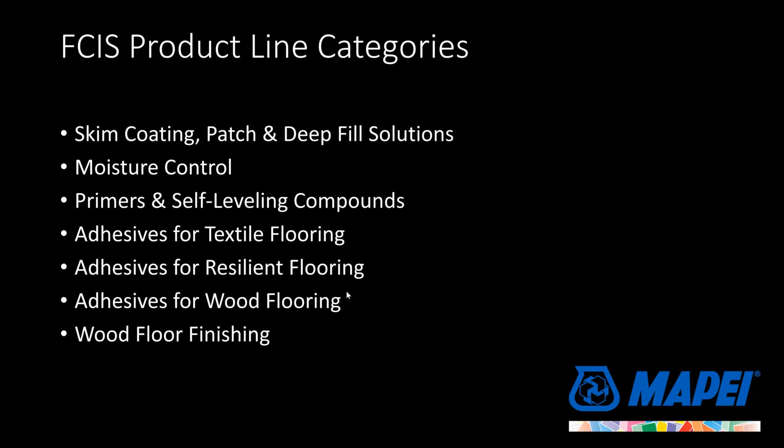Now let's drop down into first gear, hit that first corner, and talk about skim coating, patching, and deep fill solutions. I apologize, this is going to be a little bit of a catalog dump, but I'm going to talk about some of the unique attributes of these as we go along.

I don't have enough time to spend a whole 45 minutes on each one, but there is a product on our catalog that you may or may not be aware of.

It was part of our shower system for LVT, but a very interesting skim coat and patch product called Planiprep 4 LVT. It's pre-mixed based on acrylic technology.

It's high moisture resistant, very hard, very durable. It's a phenomenal embossing leveler component designed for a skim coat. Works on wood, works on concrete, works on gypsum, the whole 9 yards. And it comes pre-mixed, so you don't need water. It works on porous and non-porous substrates as well.

You'll see a couple of my made icons. This is not something the corporation has adopted yet, but I wanted to throw out a few things in the upper right-hand corner of these slides to indicate some of the key attributes of how these things work. That red triangle on top is porous and the other one is non-porous.

So the Planiprep 4 LVT can use them both. And again, once you use a little bit of it, put the lid back on it, it's good for the next project. It has no pot life like a cement-based product.

Planipatch, hopefully all of you know about that, is our Portland cement-based workhorse of patching and repair. Has a great product. It's got a very short pot life aspect to it, very fast drying, great product for general repairs, patching and ramping, the whole 9 yards.

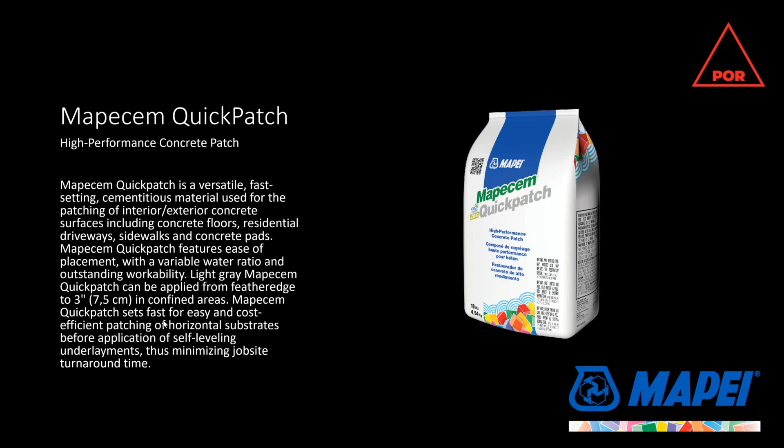resilient flooring, you might want to cover an application like Quick Patch with Planiprep PSC or SC just to get a nice skim coat version. But again, this one is designed for deep fill applications, ramping, and very fast drying.

Topcem Premix, again, if you're trying to fix a floor that has a much larger depth to fill, like a sunken living room that needs to be brought up 2 or 3 inches off the floor.

Well, obviously we have self-leveling underlayment applications for that, but that can be problematic and expensive, a little difficult to deal with. But we have a couple of solutions that are more attainable and easier to work with, and they're screed materials, basically, for lack of a better description. They don't flow per se, but they're designed to be put into deep areas, bull floated into position, allowed to cure, and then you can finish on top of them. You have to think about them as concrete in a bag, but it's not heavily aggregated. It's something that's easy to work with and ramp and do all sorts of stuff.

The other choice we have is a product we've borrowed from the textile and stone side of the fence, Slope RS. This is another great product for ramping and deep filling, perhaps a little faster. We've been using this as the product of recommendation for sloping shower bases if you're doing LVT installation in showers. Again, we like this one because it's easy to work with, easy to handle, and has a very rapid cure and very high strength by the time it's all done.

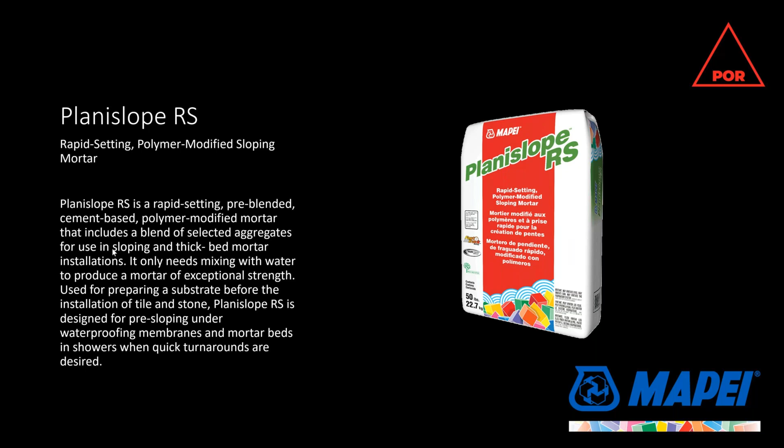So if you took a look at the patch, skim coat, and deep fill charts, you get a chance to see a little bit about their thickness of repair. To give you some idea of the extent, as I mentioned before, Planiprep PSC is a half inch, SC is 1 inch. Planiprep 4 LVT has got some limitations—it's really a skim coat material. If you apply this a little thicker, it takes much longer to dry. Mapecem QuickPatch is that 3-inch product, and as you see below, the Topcem Premix and the Planislope RS are good up to 4 inches.

So that's one of the selection drivers—we'll talk about that in a second—is how deep you have to go and how far you have to spread it. Wait time before the installation of ceramic tile, stone, carpet, resilient, and wood.

These numbers for carpet, resilient, and wood are, in my opinion, a little bit in flux, because they were basically developed back in the day when all of the adhesives had very low moisture limits to them—3 pounds of moisture vapor emission rate and 75% RH. But as you should all be aware, a lot of our resilient products and even some of our wood and carpet products are designed to be used in high moisture conditions. So that can somewhat change based on the product you're installing on top of it.

Compression strengths are listed here on the right. I do want to spend a little time saying that skim coats like Planiprep SC and Planiprep 4 LVT do not come with compression strength data, and I get this question asked of me a lot—what's the compression strength of SC or Planiprep 4 LVT? The answer is that it doesn't really apply. These things are designed to be installed in paper-thin applications, very thin layers, maybe up to 1/8 of an inch, but they're really designed for thin applications. As such, they're highly polymer modified to make sure the cement has a chance to hydrate and stick, but it's really not relevant to have a compression strength on a skim coat. If you're doing something in a deep fill or deep patch, that might make some sense, but skim coats are designed to do surface defect modification only and don't have compression strength data associated with that.

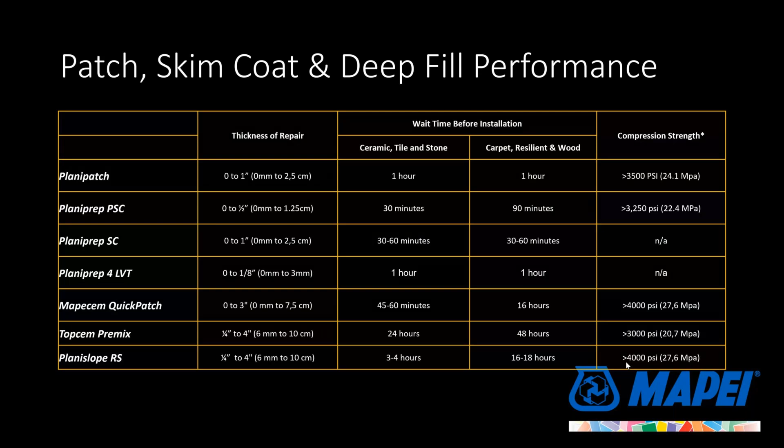Again, the selection drivers on which product to use out of that mix are going to be based on the thickness of application—am I skim coating, am I ramping, am I filling a trench? Those kinds of things will help me decide which one to use. Cost is a factor—some of these are relatively inexpensive, some are more expensive. Time constraints—how much time do I have to wait for the product to dry? And to a certain extent, some of the porosity factors involved—can I use this on a non-porous substrate or not? So those are some of the drivers that will do that.

Now we're going to take a look at the primers and self-leveling underlayments. And just to preach to the choir, you really can't talk about self-leveling underlayments without talking about primers.

You can't talk about primers without talking about self-leveling underlayments. The two of these have to go together. Self-leveling underlayments require the use of a primer in one form or another in order to function. So here we go and dive into that.

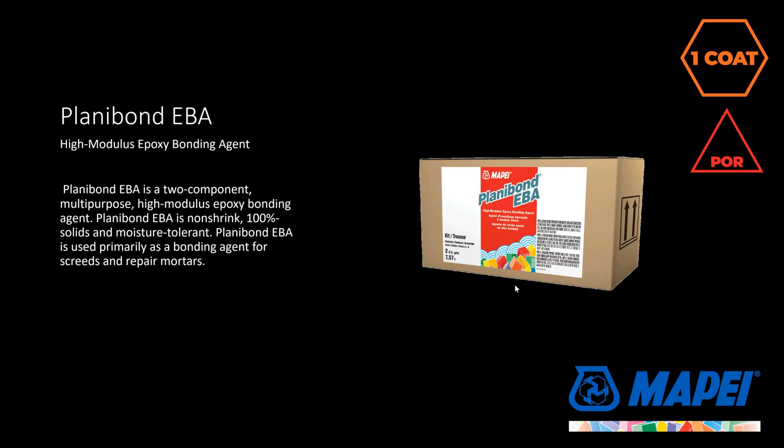The advantage with Planiseal PMB, with the two-coat and sand broadcast, versus Planibond EBA, Primer CE, and Primer E, is that this can cure up in about 4 hours total, where those epoxies will take somewhere in the order of 6 to 8 hours. So speed is an advantage here, and it's ready to use, no mixing, no hazmat products. There's a variety of good things going on with Planiseal PMB.

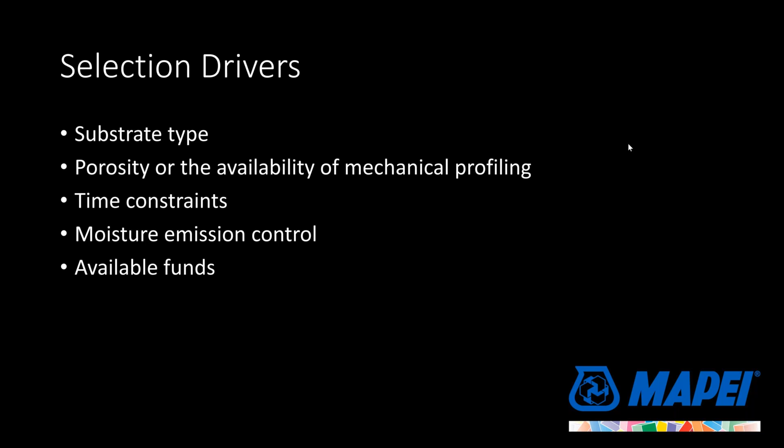Now let's take a look at self-leveling compounds. I hope we're still hanging with me and it's not getting you too far, not seasick with emotion.

So first of all, I want to go through some updates, and I've done this in previous webinars, but we'll do it again. I want to make sure you're aware that we have removed a lot of the moisture limits for self-leveling underlayments, with the exception of Planitex SLF, which is gypsum, and that's a whole different animal. But for our cement-based products, we're basically telling you that they are an extension of the cement or concrete base or the plywood base. They don't act as moisture mitigation membranes. They don't block moisture, they don't block humidity. They will allow humidity to move through it.

An advantage of a self-leveling underlayment is it's porous. The porosity helps adhesive bond to it better. If it was non-porous, it'd be more difficult to stick to.

So we're saying that these leveler compounds and their associated primers are porous, and if you need moisture mitigation for the adhesive or the flooring you're installing on top of it, then you need to decide whether or not you want to put a mitigation system on before the leveler goes down. There are some crazy exceptions as to why you would want to put a moisture control system on top of a leveler, but there are ways to do that as well. And that's why we say contact MAPEI Technical Service for that.

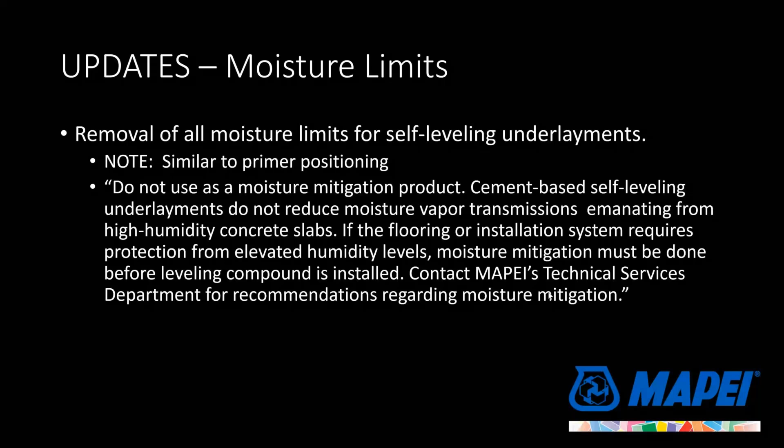We don't require the use of lath anymore over plywood decks. We do say that they have to be structurally sound with a maximum of 19.2 inches on center joists, and meet the requirements of L over 360. So it's got to be stable and properly installed. And it can be any approved plywood oriented strand board subfloors that are engineer approved.

So again, not everybody goes to OSB - and I jump to this as well - that's not wafer board, chip board, the cheap stuff that you're dealing with. This is stuff that is engineered. I believe Advantech comes to mind. Weyerhaeuser has some, Georgia Pacific has some as well, that are designed to be moisture resistant, highly engineered oriented strand board material.

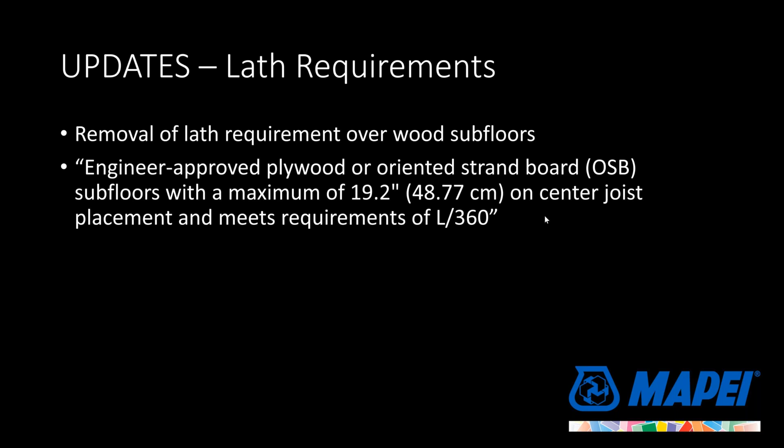So keep that in mind. We don't require lath over wood substrates anymore. There's also been a reduction of the surface profile requirements.

Our product portfolio has migrated over the years. When we used to have Portland cement-based self-leveling underlayments, CSP, the concrete surface profile, was very important, because Portland cement-based leveling compounds grow and shrink a lot more than the calcium aluminate cement-based materials we currently make our levelers on. So as you've been with us for a while, you've seen products like UltraPlan 1 change to UltraPlan 1 Plus, Novoplan 2 to Novoplan 2 Plus. Whenever you see that plus designation, it means that at some point in its product history, we migrated away from a Portland cement-based formulation into a calcium aluminate-based formulation, and as such, a lot of those things have become shrinkage compensated, similar to their easy counterparts like Novoplan Easy or UltraPlan Easy.

So we are reducing the surface profiling requirements on a lot of these leveling compounds. There are a couple of exceptions, we'll talk about that in a minute. But if you're installing UltraPlan 1 Plus and going a quarter inch maximum fill, 3/8 inch, or half inch maximum fill on the application, it's not necessary to go to the CSP of 3 or 4 prior to the primer application and then leveler. You can do that on a normal concrete substrate.

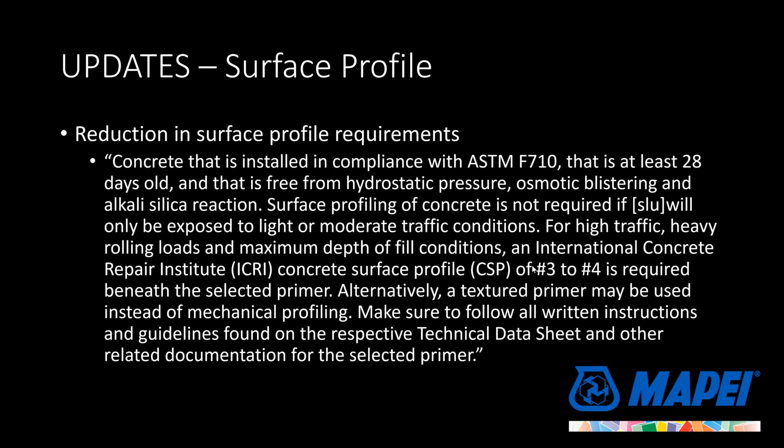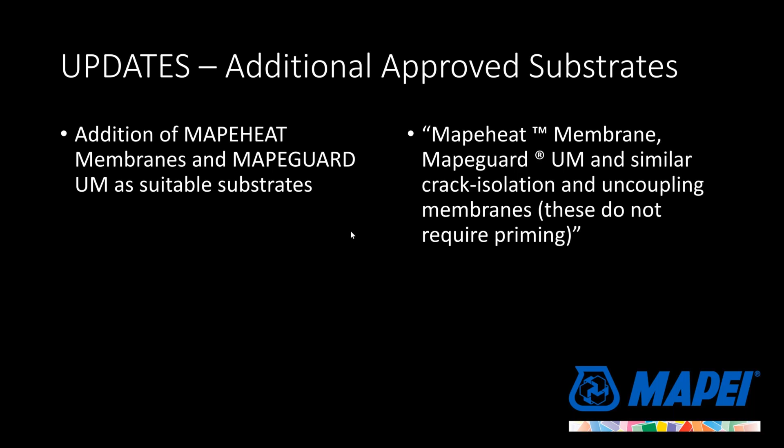We've added some additional approved substrates to the technical data sheets for all of these levelers. Now it's more than just concrete, gypsum slab, plywood, etc. A lot of our Mapeheat membranes and our Mapeguard products are now suitable substrates as well. You'll find those on our TDSs as well. So that's part of our endorsement for the tile and stone side of the fence.

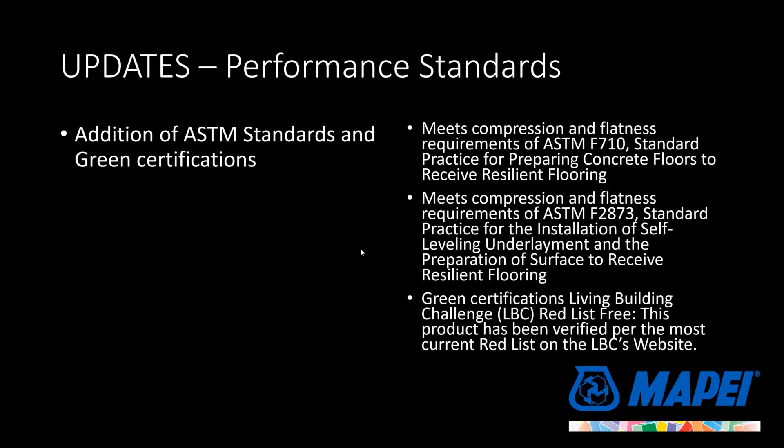We're also putting on the technical data sheets a lot more information about ASTM standards or green certifications that we meet or exceed in many cases. So that's something that's new.

And if you haven't paid attention—and I get this question a lot—the technical data sheets on most of these leveling compounds do provide pull-out strength information on the physical attributes charts. Those tests were made on an ISO block, a concrete block, over Primer T. So if you want to know what the pull-out strength is, it's going to be on your technical data sheet, so please look for that. That question is oftentimes asked for epoxy flooring applications or other high performance flooring installations where you need to know what the bond strength is from the leveler to the substrate.

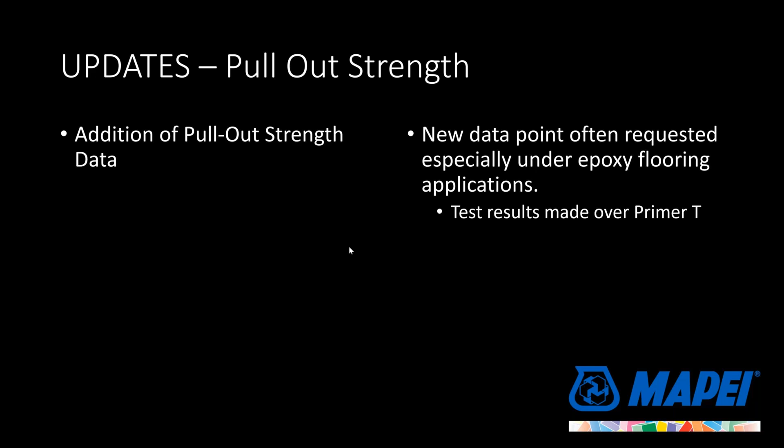All right, so now we're going to jump into the product portfolio itself, and we start off with Planitex SLF. This is a fiber reinforced gypsum based self-leveling underlayment. This product I don't think gets enough press because it's really a phenomenal leveling compound, mixes very nicely.

Creates a very smooth surface, very high compression strength material, and would work, as far as I'm concerned, as a definite commercial grade application. The only downside about gypsum products is that they cure differently. They have to cure by evaporation. All the water that went into them has to come out in order for this thing to work. It's like a plaster cast on your arm. You have to let it dry, and if you get it wet, it gets messy.

So typically Planitex SLF is recommended for concrete slabs on grade as long as there's a moisture vapor barrier at the concrete slab, or over an epoxy membrane or moisture control membrane, or definitely above grade where it would be used. It can also be used to cover radiant or in-floor heating systems as well.

Then we get into the calcium aluminate based materials. Novoplan Easy Plus has been with us for many years now. Its claim to fame is that it can be used over non-profiled concrete or other surfaces, can be used over existing well-bonded flooring, for example.

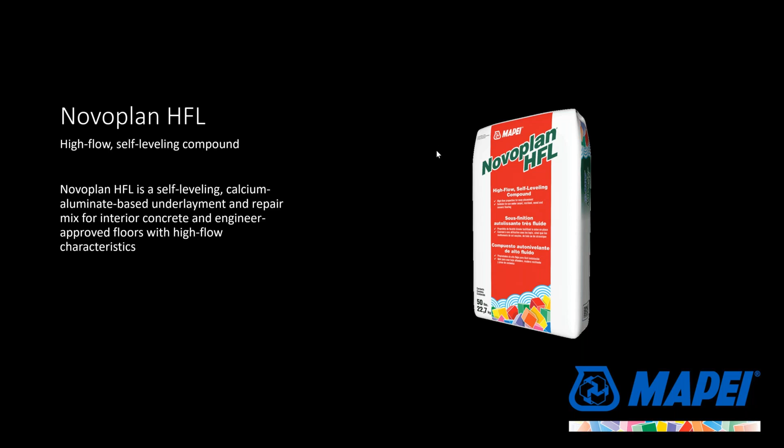Novoplan DPL, introduced again several years ago, designed for the application of self-leveling underlayments up to 4 inches in thickness in a single application. Now, I want to make sure, while I've got you on this for a moment, these require a little bit more effort to be able to do a 4-inch pour of anything.

Again, keep in mind that these products are very liquid when you mix them together. They're not sticky, they want to flow. So in order to get a 4-inch lift, you're going to have to do something on the floor first before you start pumping in Novoplan DPL, and that is the creation of dikes and dams to be able to control the pour.

A lot of times people will use Planipatch to create ramping, or dikes, if you will. They use Quick Patch or Planislope RS to create like a waffle appearance on the floor that creates these little ponds, if you will, where you can pour the leveler at a 4-inch pour.

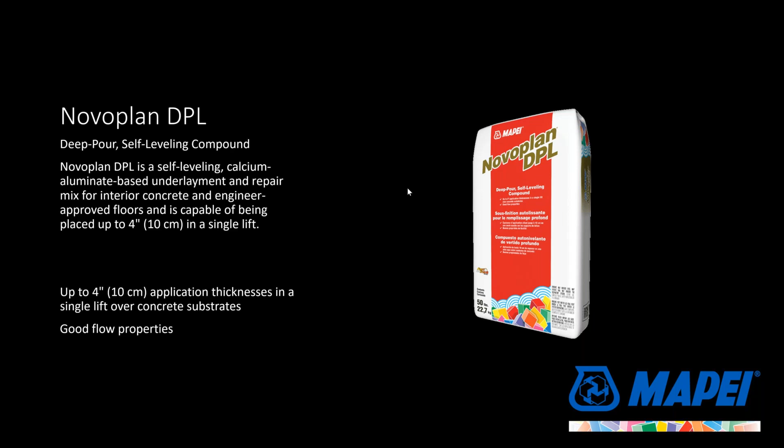But trying to do this in a 1,000 square foot area without any kind of diking is going to be a problem for you. It's going to continue to roll, the product will start gelling, the surface is going to wind up looking bad. So we need you to work with these deep pour products in more confined spaces. They work great, but it requires a little bit more effort going forward.

Novoplan 2 Plus, this is one of our contractor go-tos for a lot of products. Again, good flow characteristics, high strength, self-leveling underlayment with somewhat of a quicker curing time, but again, a great product for self-leveling applications. Again, a go-to for the major flooring contractor business.

Ultraplan 1 Plus, this is when we start to get into our premium products, a little bit higher compression strength, higher flow properties, and faster curing.

Ultraplan 1 Plus is designed to compete with some of the best in the business. Thanks to the efforts of the sales force, our production capacity, and R&D groups, I believe MAPEI has become the number one supplier of self-leveling underlayments in the North American marketplace. I know for sure in Canada, and we're definitely making a big swing at it here in the US as well.

Ultraplan Easy is another one of these shrinkage-compensated, low-profile-requirement products. It can go over existing floors, existing terrazzo, without having to profile them.

Ultraplan M20 is the only product I have in the floor covering installation system that can be an exposed surface. Everything else we sell in FCIS is designed to go under floor covering, with the exception of M20 and some of our Ultracoat products, which we'll take a look at later in the presentation. This one is designed for warehouse flooring applications. It's non-colored, doesn't have color control, so it's a natural cement-based product. Please don't expect a uniform look throughout the line. But it has very high compression strength, and requires that sand broadcast, epoxy curing, epoxy primer going forward—that's how it works.

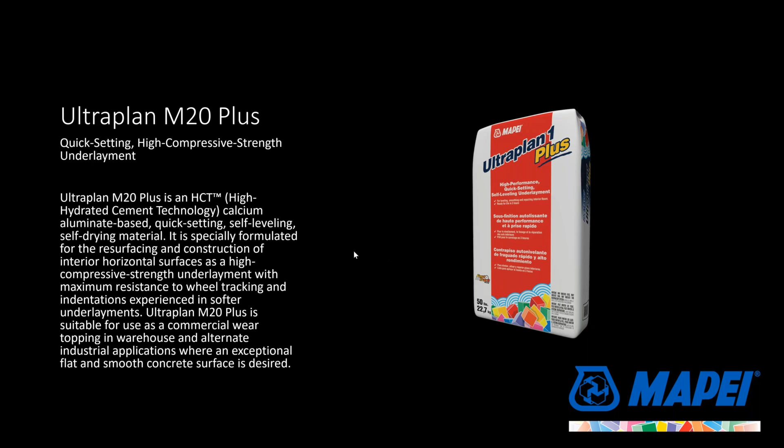Ultraplan Lite is a newer product we've had for a while, and it's been a lifesaver for many applications. Keep in mind that a typical self-leveling underlayment, gypsum or calcium aluminate cement products, has a typical density of about 120 to 130 pounds per cubic foot. That means each inch of that leveler weighs about 11 to 12 pounds per inch. So if you're putting a lot of leveler on a floor, that's adding 12 pounds per square foot additional load. If you're trying to get 2 or even 3 inches of leveler application, that could be an additional 36 to 40 pounds per square foot you're adding to the floor.

Not all substrates are capable of taking that weight, so we developed Ultraplan Lite, which is roughly half that density—about 67 pounds per cubic foot. That will allow you to get to those deep pours. It's suitable up to 2 inches in a single application without putting so much weight on the floor. We've done a lot of work with this leveler on cantilevered projects and suspended ceiling materials, where you really can't add that much weight on top of the existing floor. That's the reason for it.

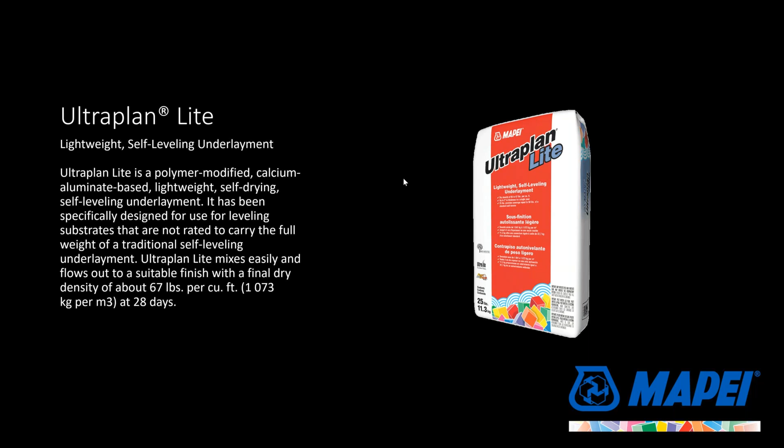Ultraplan Extreme 2, as I mentioned at the beginning, is our go-early product solution. It's designed for environments with no windows, no doors, exposed to the natural environment—rain, snow, etc. It can be exposed to rain within 6 hours after application without showing any signs of degradation. Same with freezing conditions: give it 3 days to cure and it can freeze without a problem. That might be a problem for some of our other products, and that's why Extreme 2 has its home.

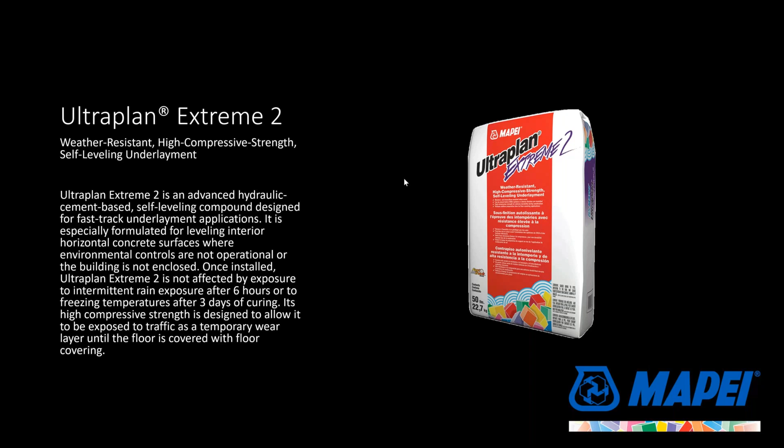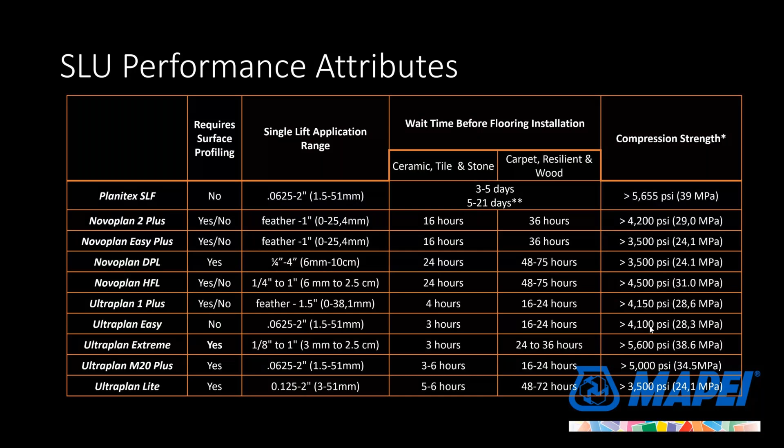So the performance attributes—this chart is available in our catalogs for you to download. Here you'll see the main attributes. Everybody wants to look at the compression strength, and that's available as well. Cure times for ceramic tile and stone, or for carpet and resilient wood, are available, as well as the single lift application range. Many times people ask me, what's the time I have to wait for a second lift? Say I'm using Novoplan 2 Plus and it's got to go an inch, and I want to get to 2 inches—how long do I wait before putting the second layer on? I'll typically recommend they look at the time frame for carpet and resilient wood. The 36 hours would be the recommended time frame for second lifts on any of these levelers. Ultraplan Lite, at the bottom of the list, requires 48 to 72 hours for carpet and resilient wood—that's the number I'd recommend for a second lift of Ultraplan Lite if you had to do it.

So what are the selection drivers for this? Time constraints—do I have time for it to cure and dry out, or don't I? If I have time, NovaPlans are good, and Planitex SLF will be good.

For traffic conditions like high traffic, heavy rolling loads, or metal casters, I'm going to go for products that have a higher compression strength.

If instead it's going to be covered with carpet and foot traffic, I can go to a lower compression strength number. Obviously, available funds matter too. It'd be nice to do everything with Extreme 2 or one of our higher end products because of all the bells and whistles associated with it, but not every project has that. Depth of application also matters, as you saw on that chart, there are certain products that can go to half an inch, 1 inch, 2 inch, 4 inch, etc., and you might need to deal with that.

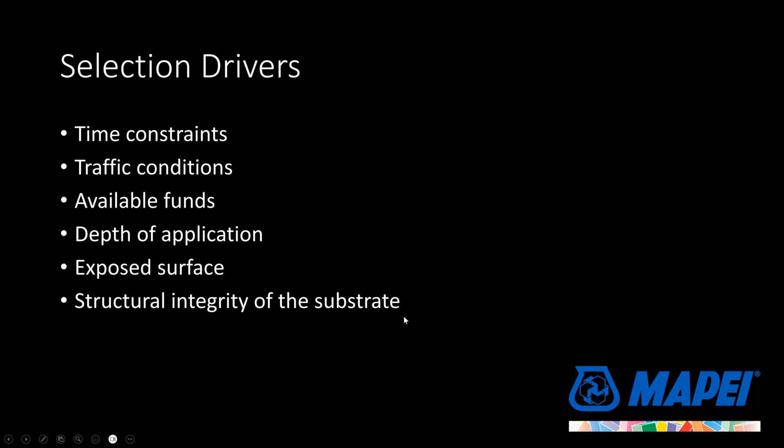The exposed surface, what does that look like? And the structural integrity of the substrate - if it's not capable of taking all that load, then that's something you need to be aware of and look for the selection of Ultraplan Lite, for example.

Moving on to moisture control solutions, we have a few of those as well, and we've covered some of them in the past. To begin with, Planiseal VS - this is the so-called gold standard for moisture vapor control. It has perm ratings of less than 0.1 according to the ASTM E96 test methods. It complies with the ASTM F3010 requirement for epoxy moisture vapor barrier applications, etc.

It's good up to an RH of 100. It's suitable for slabs with pHs up to 14. It can be used on concrete slabs that are only 5 days old, which means they're highly alkaline and haven't had a chance to carbonate, and typically it's a one coat application. You do need to apply this at about a 14 mil wet film thickness on CSP profiled concrete in order to make it work, and it will take approximately 6 to 8 hours to cure at 72 degrees Fahrenheit.

Again, all epoxy products are thermoset and are affected by changes in temperature. So if it's a hot day, it's going to cure faster. If it's a cold day, it's going to cure slower. That's something to keep in mind.

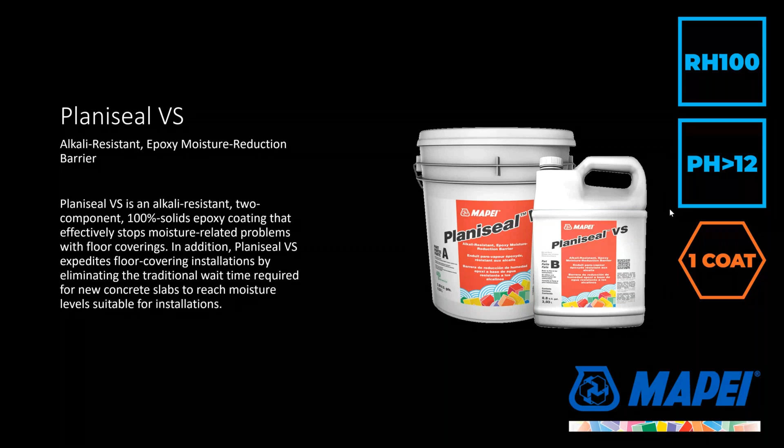Planiseal VS Fast was developed because Planiseal VS is a little bit slow, so VS Fast does things a bit faster. Again, RH is 100%, 25 pounds moisture vapor emission rate, pH up to 14, one coat solution, but it will cure up in about 4 to 6 hours rather than the 6 to 8 hours of the other product. So if you're trying to get something done a little bit quicker, this is the way to go.

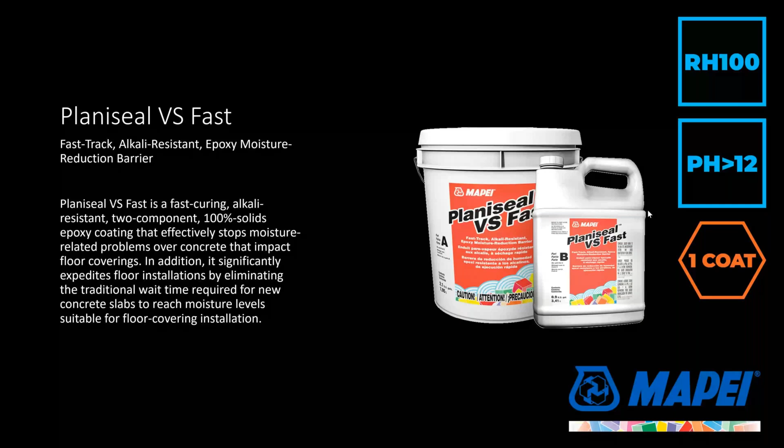Or you can go to Planiseal PMB, which is a one-component polyurethane moisture barrier. It requires 2 coats to create the 100% solution. It can be used on slabs with pH up to 12, but does require the substrate to be porous - you cannot use this on non-porous materials, and it needs to absorb or soak into the concrete somewhat.

This is one you definitely do not apply in thick layers. It's a very thin, neat film that goes down as the first coat. If you put it on too thick, it creates a little crusty surface - not to be alarmed about that, that crust can be scraped off. The material underneath it will immediately cure, but you don't want those crusty things on the surface because nothing sticks to it, and it becomes a weak part of the bond line later.

Again, 1 component, 2 applications of PMB with sand broadcast for leveling applications, 2 coats directly for loose lay applications on top - we're recommending that as well. 1 coat of Planiseal PMB works if you're using our urethane or MS wood adhesives for wood installation. We'll talk a little more about that when we get to wood stuff.

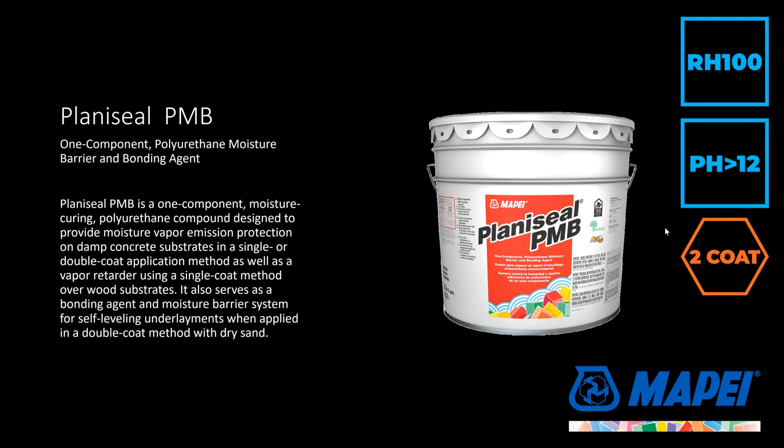But this, in my opinion, is one of the silver bullets for wood floor claims. A simple coat of this on porous concrete or even a plywood deck will, in conjunction with any of our urethane or modified silane adhesives, create a great base for wood floor, protecting it from damage that might be caused from subfloor moisture emissions.

Planiseal MSP, we've spoken about this as well in the primer solutions, but this also is a great moisture control membrane for a little bit less than the other big gorillas we've discussed. This has an RH level of 99%, the pH has to be less than 12, and it is a 2-coat application for that moisture control solution, requiring porosity for it to work.

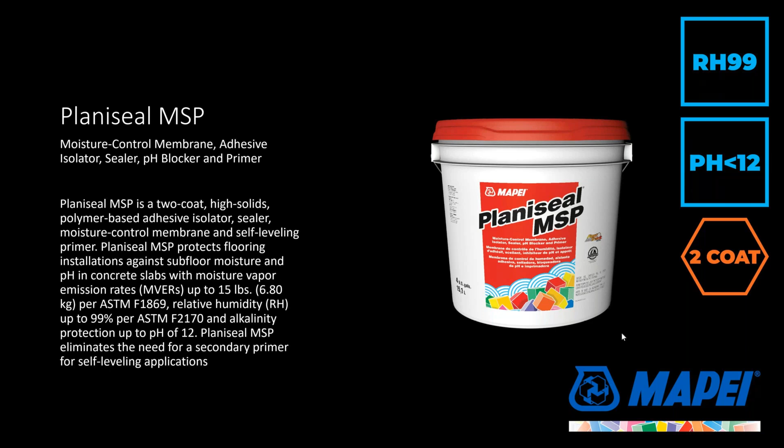So there you go with Planiseal MSP. Again, what are the drivers on that? It's the moisture levels in the substrate. If you're dealing with things above 15 pounds, you've got to look at Planiseal PMB, VS, or VS Fast. For pH conditions less than 12, Planiseal MSP would work.

Time constraints matter too, since a lot of these products have different dry times. Planiseal VS is the longest, while MSP or PMB are the shortest. Then there's the protection required by the flooring system. Sometimes it needs a full coat, less than 0.1 perm data point, or wood adhesives require a single coat for PMB. The type of flooring installed, whether resilient, carpet, wood, or ceramic, matters too, and so does porosity, or the availability of mechanical profiling.

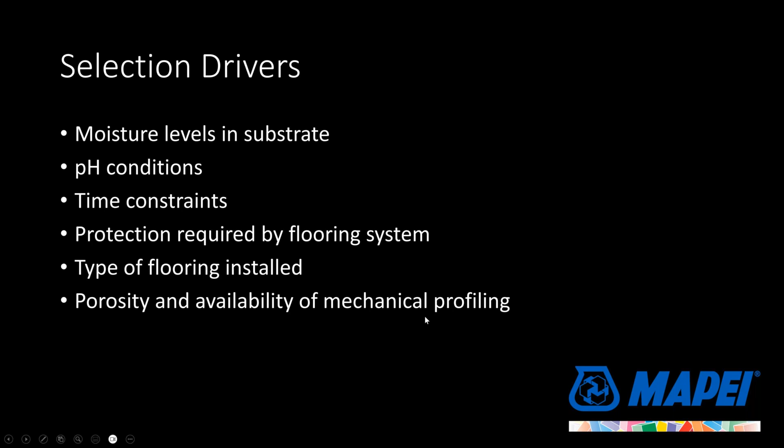Okay, now we're making progress. We've gotten the floor prepped, moisture controlled, leveled and smooth. Now let's talk about bonding solutions for textile flooring.

We start with Ultrabond Eco 20. We don't talk much about this anymore since there isn't much broadloom carpet being installed. Some shows up in hospitality markets, sometimes on Main Street, but for the most part everybody's gone to carpet tile. Still, there's a little broadloom carpet installed, and Eco 20 is a base grade product designed for that. It's old school technology, based on styrene-butadiene rubber latexes, not acrylic.

The one benefit of Eco 20 is if you have to remove the carpet in the future, within 3 to 4 years after installation, it's not terribly difficult to pull off the floor. So that's something to keep in mind.

I had a conversation with a contractor once who installed all his flooring with high-end, high-solids, high-performance multi-purpose adhesives, and he was kicking himself afterward because removing that carpet 5 years later required terminators, metal, and very heavy duty mechanical equipment to pull it off the floor. So think about where you're planning to use these products and how often the flooring will be replaced before you select an adhesive.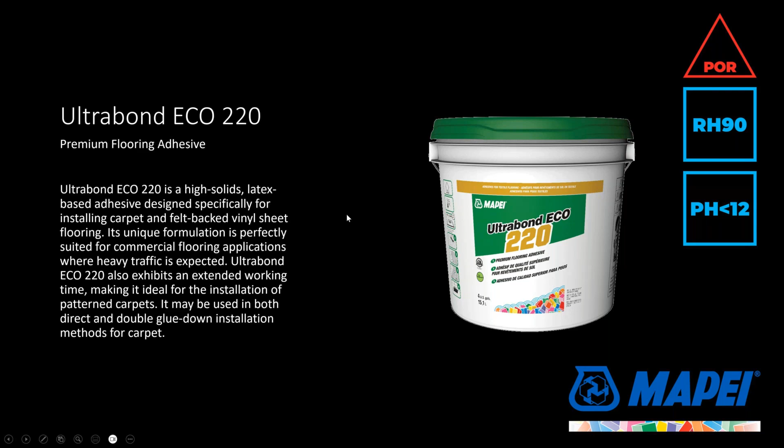But again, relatively low RH levels, pH less than 12, must go on a porous floor as well. Eco 811 is our product for carpet tile of all types. We've gone through some modifications on this over the years because carpet tile manufacturers keep shifting things around on backing types. But Eco 811 was designed to work with basic PVC stuff, non-PVC stuff, bitumen-based stuff, felt, fleece-back stuff, you name it.

All this kind of stuff can be done. It can work on non-porous as well as porous substrates. Again, this is designed to be used as a pressure-sensitive adhesive, meaning all the water has to come off of it, leaving you with a very sticky floor, which you can put your carpet tile in, take it out, put another one back in, and so on.

You can use this as a wet lay method, and we sometimes recommend this for double stick carpet installations. That helps give you a more permanent bond, a more durable bond, something that's not easy to take apart, but you can use it for that if you have to. Eco 811 can also be used for fiberglass reinforced sheet vinyl and a variety of other products as well.

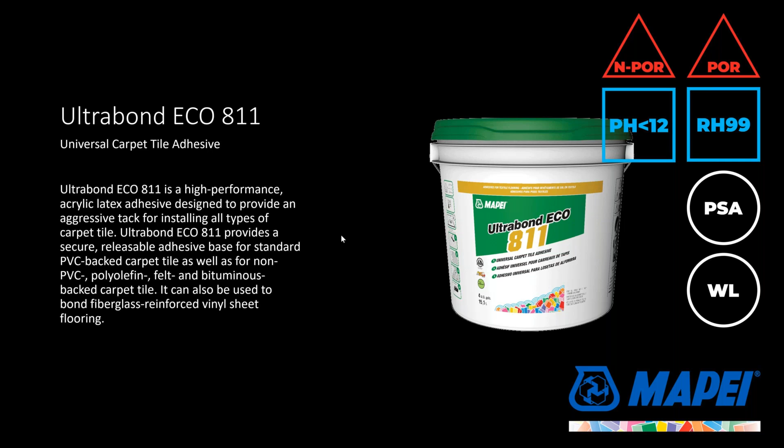Eco 420. Now you'll notice I don't have any icons on the right hand corner. It's not a mistake, this is designed for use outside, so the moisture limits don't really apply. Can be used on porous or non-porous substrates, even fiberglass deckings, fiberglass boat decks, etc., for the installation of traditional outdoor carpet. It's also a phenomenal adhesive for indoor applications as well.

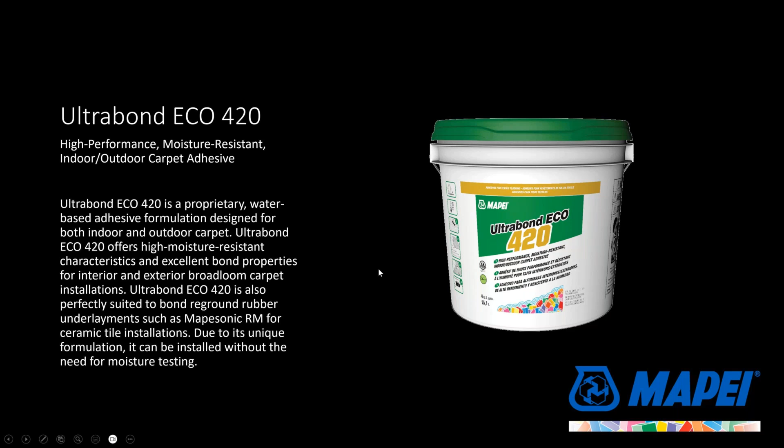This is very strong bonded, it's got some great properties in terms of grab, strength, etc. But it's also recommended for Mapesonic RM and ceramic tile installation. So it's got some great usage here in the marketplace. Don't forget, it's more than just an outdoor carpet adhesive.

A couple of accessories. In the carpet domain, Eco 2285, this is an acrylic seam sealer. For those of you who may not be familiar with carpet installation, every time you cut a piece of carpet, you must seal the edge of the seam with a seam sealer to keep that carpet from raveling.

If you've ever been on a project or a job site and you see a row of the carpet tuft ripped out, it's because the installer did not use a seam sealer to lock that edge in. So it's a very important aspect of the direct glue down application of carpet on the job site. So that's something to remember. We have that. 3185 is a carpet pad cement.

This is more of a residential function more than commercial, but it's designed to hold a urethane sponge carpet cushion used in stretch-in carpet installations on residential applications over concrete substrates.

Again, this is if you're putting carpet in your home and you have a wood subfloor, the carpet pad goes down and the installer will just hit it with a couple of tacks to hold it in place. If you're doing that, putting carpet in your home and you're working with a concrete subfloor, you can't use tacks to hold it down, so you use a glue to be able to hold it down.

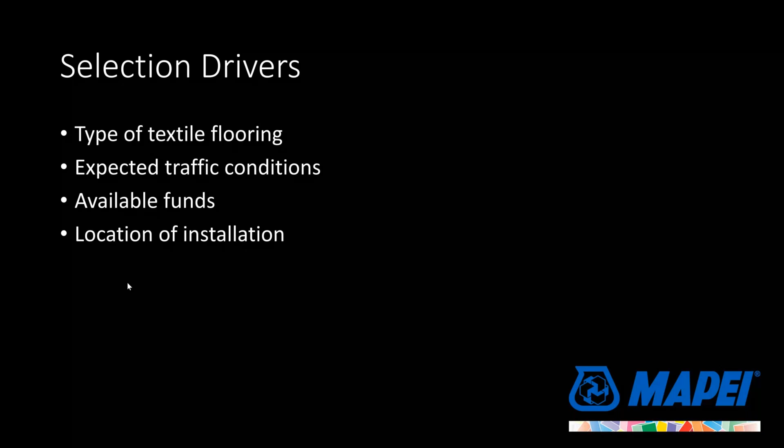Anyway, selection drivers for which one to use: the type of textile flooring, expected traffic conditions, obviously we talked a little bit about that, available funds, and the location of the installation. All those kinds of things are going to help drive which one of those products to use.

Now we're getting into resilient bonding flooring solutions. And if you thought I had enough self-levelers and underlayment formulations, wait till you see what we have for resilient. It's okay, the resilient market is booming right now, so we've got a bunch of choices for that as well.

We start with basics. Ultrabond Eco 711 has been a tried and true styrene butadiene rubber sticky latex designed for the installation of vinyl composition tile. This one is a little bit lower price point than some of our acrylic pressure sensitives and is the go-to product for installation of VCT, vinyl composition tile.

Can only be installed in a pressure sensitive mode, which means all the water is going to come out. No touch to the adhesive, can't transfer to the touch when you pull it out. It's got some relatively robust RH limits of 95%. I think the moisture vapor emission calcium chloride test is 8 pounds, whatever. Can be used on non-porous or porous substrates, again, but can only be used in a PSA mode as well, not wet laid at all.

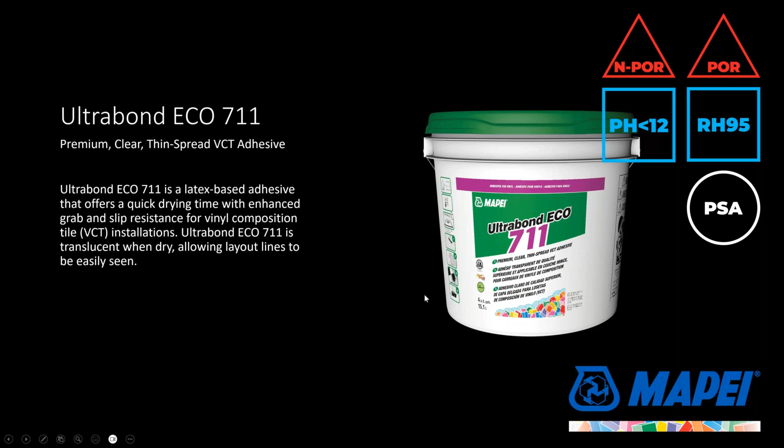Eco 575, this is probably the industry's go-to cove base adhesive. We sell oodles and oodles of this stuff. Light in color, acrylic based, comes in all different kinds of sizes, 10.5, 29 ounce, gallon quart, 4-gallon units as well, but is the go-to for holding vinyl and rubber wall base to vertical surfaces.

Again, porosity is somewhat required for this to be able to work, and it's a wet lay type of application. Eco 575 is also the product we recommend if you're installing carpet on the wall. So keep that in mind if somebody ever asks you, how do I stick carpet, broadloom carpet ActionBac on the wall?

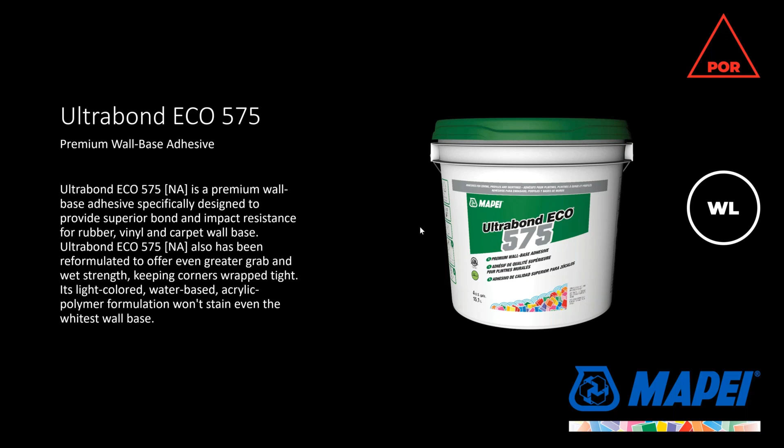Now we get into some of our acrylics, and one of the older ones we have in the line is Ultrabond Eco 350. You can see the RH level is about 80%, which means it's not one of those designed long-term for high moisture resistance. It's been in the market for quite a while and it still has a great following.

It can only be used over porous substrates, and can be used in somewhat of a pressure sensitive mode. You let it flash off so it no longer transfers to the touch. There might still be some whiteness in the ridges, but primarily you would do this in a semi-wet or wet lay application for Eco 350.

So again, if your concrete slab is dry, with numbers coming out less than 80%, Eco 350 is a great solution for solid vinyl sheet, luxury vinyl tile and plank, you name it. Not necessarily recommended for rubber flooring—some of our other products will do that—but 350 is for the vinyl applications.

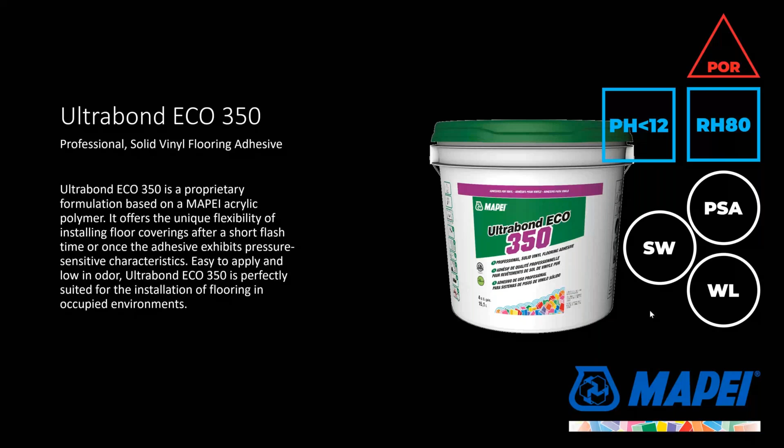360 was an improvement on 350. This product provided enhanced dimensional stability control to keep things from gapping and keep seams from opening up. It's definitely the product we introduced that had heavier rolling load resistance.

But again, we're not talking about something that was designed for high moisture conditions at this point. This was something you would install over a mitigated leveling compound or a drier concrete slab. The challenge with Eco 360 is it has a limited working time of an hour and a half, maybe two hours at most—you really need to be working on that when it's a semi-wet or wet lay installation. But it's a great product with a great history and good track record.

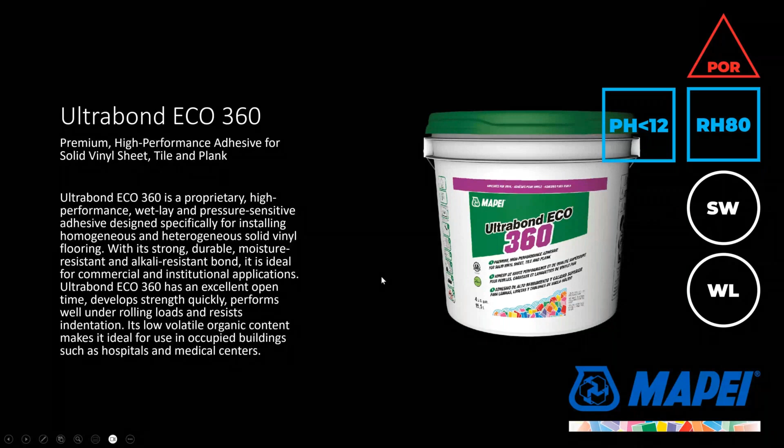Moving into something a little more new to the marketplace, Eco 373 took the LVT market by storm a couple years ago. This was a highly aggressive, pressure sensitive adhesive designed for use on slabs that are 99% RH, porous and non-porous substrates, with pH less than 12.

It got its claim to fame using the pressure sensitive adhesive mode. Contractors would spread 1,000 square feet, let it all flash off, and then come in and start throwing luxury vinyl plank on the floor like dealing cards out of a deck in Vegas. It was very fast, very easy to go.

Markets changed somewhat, and many flooring manufacturers are recommending semi-wet or wet lay applications. We've verified that Eco 373 can be used in a semi-wet or wet lay application on concrete slabs as long as they're porous—you need to provide porosity at the same RH levels. So 373 can be installed semi-wet or wet as long as the slab is porous at an RH of 99% and still provide functionality, which will help improve the dimensional control of the adhesive.

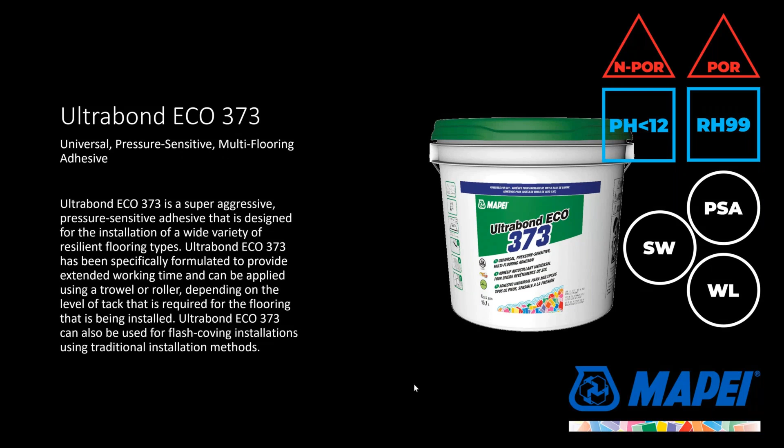Eco 373 is what I'd consider a super PSA—very aggressive, very sticky, but may have a little less modulus than some of the other products we're dealing with. That's why Eco 399 was developed. Eco 399 was also given a high moisture resistant rating, porous and non-porous, pressure sensitive mode, and did more to control dimensional movement of the flooring.

Now, keep in mind—little soapbox moment here—LVT is becoming the flooring of choice of the industry. We get that because it's easy to install, it comes in a box, it's like putting Lego together.

But what people are failing to remember is that this stuff is a piece of plastic, subject to changes in temperature. If you're installing it hot, say 90 degrees in the room, and everything looks beautiful, then you walk out, the homeowner turns on the air conditioning and everything chills to 70 degrees—things are going to shrink and you'll wind up with gapping everywhere you look. It's unavoidable because the plastic does that.

The same thing is true if you install it cold, at 50 degrees, and everything looks fine. You leave the job, the homeowner turns it up to 72, everything grows, and you wind up with peaking, cupping, and doming. So you've got to install these products at room temperature, or the temperature at which they're going to be operating, to make them work.

399 will help control some of that, but it is not the end all to be all. Again, it's still a pressure sensitive material, and definitely a higher modulus material. You can install in a PSA mode. As mentioned before on 373, 399 can also be done on a semi-wet or wet lay application, as long as the concrete slab is porous, and you will get better control.

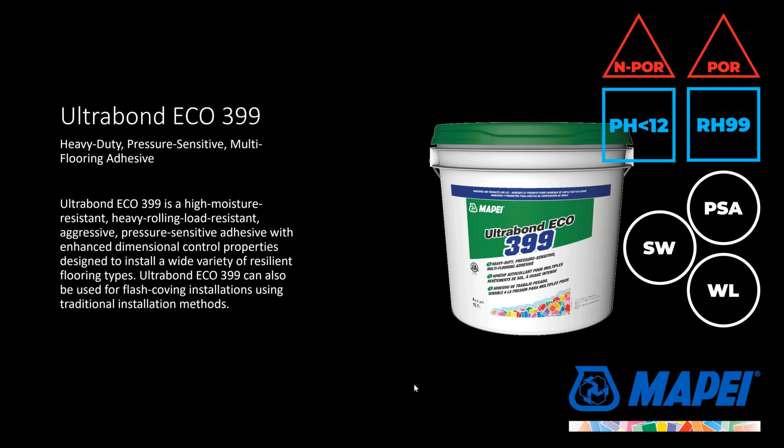379 is a product we introduced recently. This was our answer to spray adhesive, stuff that was in a can. It is a roller applied material, and as a consequence, it's a very fast product. In terms of application and dry time, it dries out in about 10 to 15 minutes and it's immediately ready for floor covering. Again, it's only a PSA mode, high moisture resistance, pH less than 12, porous and non-porous substrates as well. But it's designed for reducing time. You can stand up and apply this with a 3/8 inch nap roller and really get some adhesive coverage very quickly. I got a great product reference for this from a contractor in the Midwest who loved 379.

He used to be a tape guy, liked to use double-sided tapes for installation of sheet goods, but he said 379 was great—easier to manage and handle than big sheets of tape. Once the adhesive was installed, he came back with a sheet vinyl and did the heat welding. Everything was great. We love it. So 379 is out there. Keep that in mind as well.

Eco 570, a bit of a departure. This is designed for reground rubber underlayments or sport flooring, and a little bit of a position. It's 100% solids moisture cured urethane, wet lay only, porous substrates primarily, but can be used interior and exterior for the installation of reground rubber sport flooring. So the stuff that's going in gyms and walk off mats for horses and stables and so forth can be used for that application.

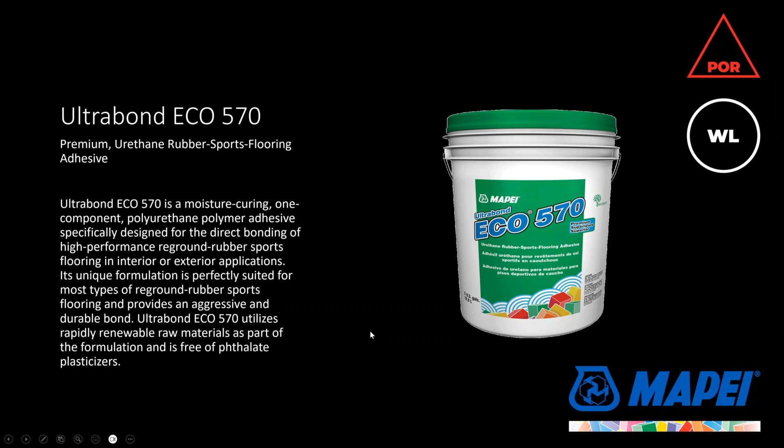All right, G19, again old school, 2-component, epoxy modified polyurethane 2-part system with a little splash of solvent in it. These are, how do I explain, the top end installation materials. If you want the ultimate in dimensional stability control, the ultimate in heavy rolling load resistance, or you're going to install in areas exposed to vast changes of temperature—like a hot yoga studio, for example—and want to put LVT and keep things from moving, G19 would be the way to go.

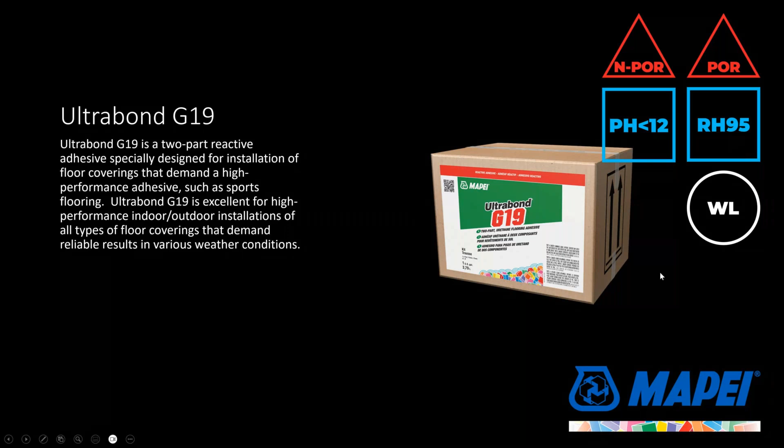G21, another one of those variants, but without the solvent addition. If you wanted to get that high performance in a more critical environment, like a hospital, for example, G21 does the same thing. Again, if you wanted a situation where you have to have the ultimate in control, heavy rolling load resistance, heavy casters, and so on, G21 is the ultimate solution.

But it is a wet lay product only, as well as G19, which does mean you have to install things a little bit differently. It's not something you can work on while you're installing it. So if you put a sheet down into the open adhesive, you cannot walk on it, put your knees into it, or put your roller on it, because the adhesive will squeeze out from underneath and you wind up with bubbles in the project. You've got to put walk-off boards—people use 1/4-inch masonite, plywood sheets, whatever—to keep from walking on that freshly bonded solution.

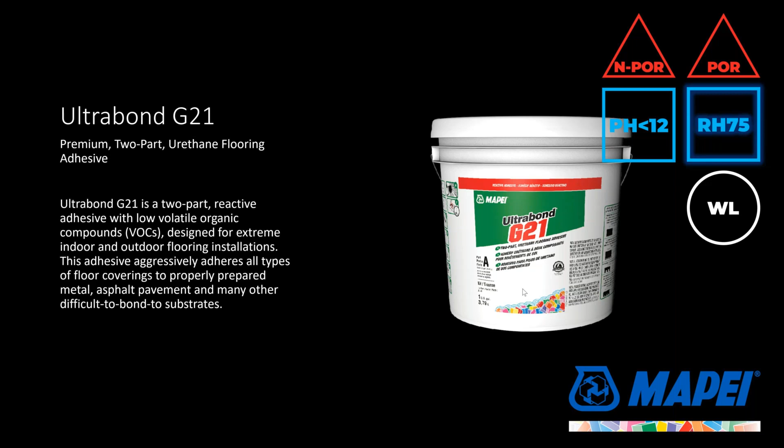Eco 901, a bit of an oddball that doesn't really fit anywhere, but this is for fiberglass reinforced panels. It's an acrylic adhesive, high body, high viscosity that helps hold fiberglass reinforced panels to porous walls like drywall or cement block. A lot of this stuff is being used in wet environments, or in freezers or refrigerators or areas like that.

Anyway, then we have a few other specialized products that were part of our shower system for LVT, but I'm reassociating them into the resilient family, so don't forget about them. These are 1-component, moisture cured, silane modified materials that provide the same kind of performance attributes that G19 and G21 do in a 1-component solution, and a product that doesn't have a pot life.

You don't have to mix components together. You pour a little bit of MS for LVT onto the floor, put the lid back on, and you'll still be able to use it down the line. RH levels of 100%, works on porous and non-porous substrates. It also provides a new icon here in the corner: a moisture barrier and bonding solution in one. This provides the perm reduction needed for moisture sensitive flooring on top. It's a 1-step solution going forward.

MS for LVT wall, same situation, but this is a higher viscosity. We've developed this one to hold LVP plank and tile in a vertical application without slipping. The regular MS for LVT would not be able to do that, so we have this product available as well. It works in wet lay conditions on non-porous substrates as well as porous. It's part of our shower system. If you're putting LVT inside a tub surround or bathroom wet environment, this is the adhesive to go to.

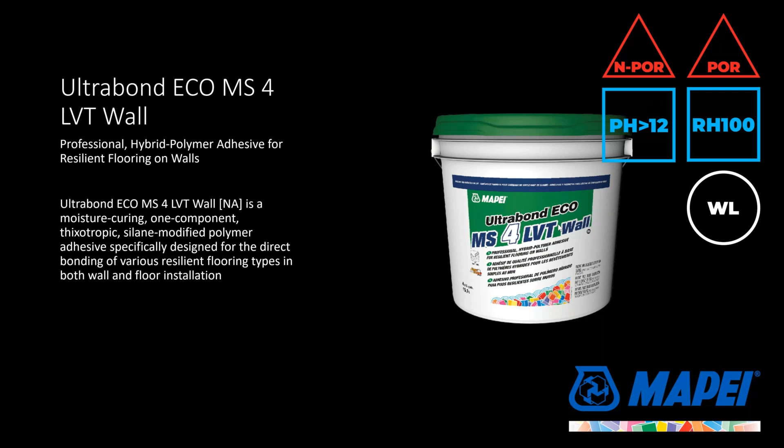There's another product that goes with it, applied on top of the floor. The MAPEI coat for LVT is a 2-part aliphatic isocyanate cured coating with traction control. If you want to provide traction on resilient flooring exposed to water or wet environments—say in front of a produce section, walk-off areas in retail environments, geriatric homes, or assisted living homes where people are worried about slip and fall—this meets all ADA requirements for wet traction. It's something to keep in mind, not an adhesive per se, but part of that resilient family.

A couple of new products we're adding that you might see on our website are available only in retail environments. Our newest one at this point is Ultrabond Eco 303, a floor repair adhesive. It's designed to be injected underneath a wood floor, resilient floor, or ceramic tile floor to help solve hollow spots or debonding issues. It's a water-based material. You simply drill a 1/8 inch hole into the surface, put the nozzle in, inject it with a caulking gun, roll it around with a hand roller, put weights on top of the bubble area, and within 24 hours that will lock it down and solve the problem.

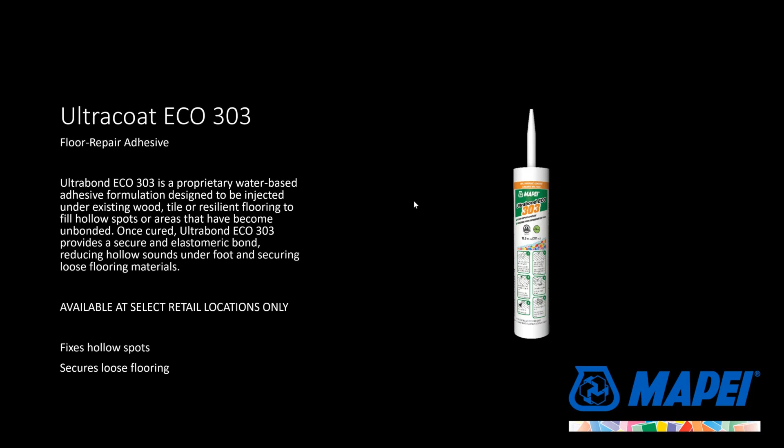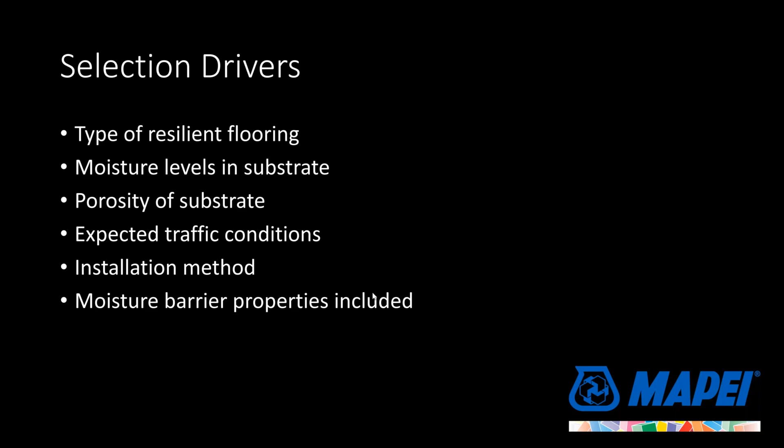So the selection drivers for all this: the type of resilient flooring involved, whether it's vinyl-based, rubber-based, or non-PVC, as well as the moisture levels in the substrate. We've got adhesives that are less moisture sensitive than others. Porosity of the substrate matters too—some products can only be used on porous substrates, some cannot. Expected traffic conditions, heavy traffic or foot traffic. Installation method, wet lay versus pressure-sensitive adhesive versus semi-wet. And moisture barrier properties included may be important when people select that, which is where they'd go to the MS 4 LVT products, for example.

Wood flooring products—hope you're all with me so far. It's 12 minutes after the hour, so we're getting close to the end of the race. Hang on, take a sip of water, only a few more laps to go.

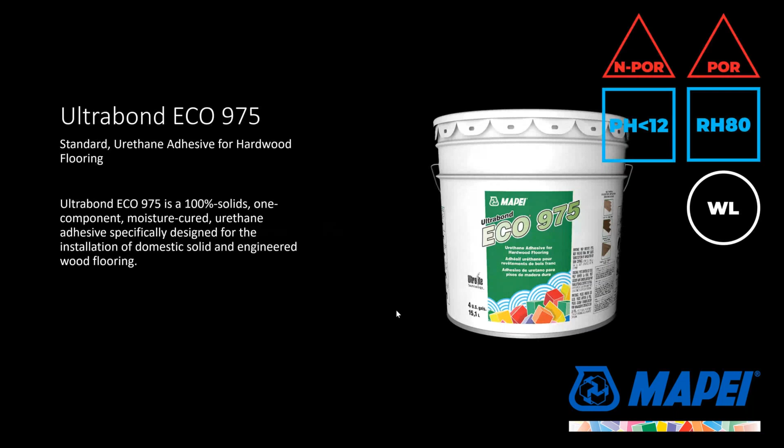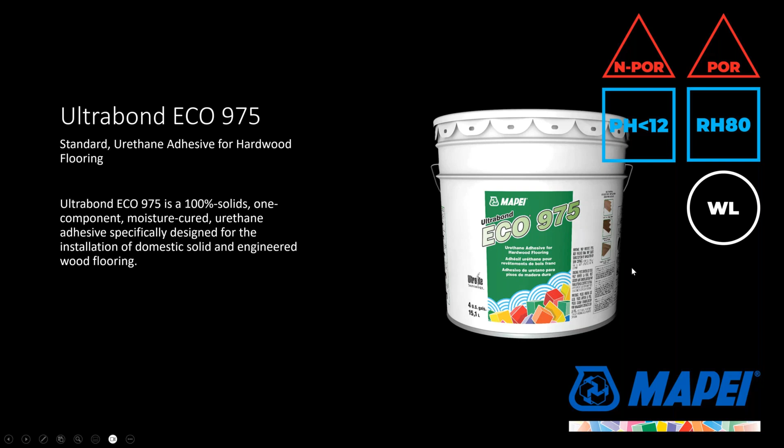When it comes to wood flooring, we have a few selections as well. We start with Eco 975, a urethane adhesive for hardwood flooring. It's designed for pH levels less than 12, relative humidity numbers less than 80%. It can work over porous and non-porous substrates, wet lay only. 975's claim to fame is that it's a lightweight version—this 4-gallon pail weighs approximately 20% to 25% less than the normal 980. So if you like something that doesn't stretch your arm out when moving it around, go to 975. Again, designed for domestic installation, domestic hardwoods, as long as your concrete slab is at 80% or less.

980 is MAPEI's workhorse for wood floor installation everywhere. We sell more of this than you can possibly imagine. It's designed for concrete slabs that are drier, 80% or less. Again, porous or non-porous, designed for both domestic and exotic and bamboo flooring as well. It's a wet lay application only, obviously—none of these products can be used as pressure sensitive.

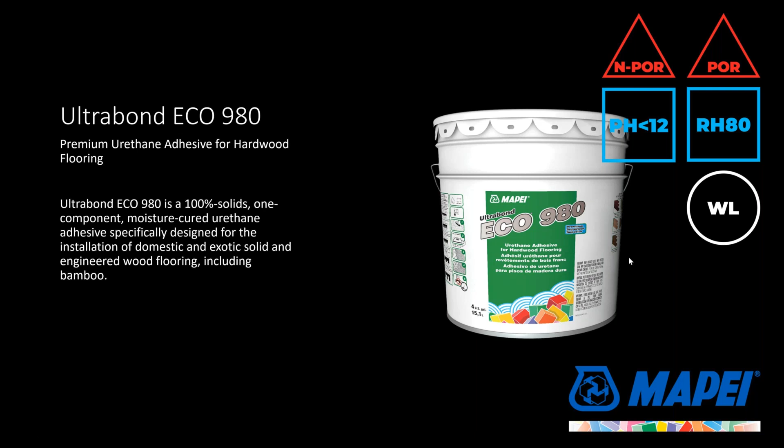Then we get into our moisture barrier and bonding solutions, and you'll see our first introduction is a modified silane material, Eco 985.

Comes in a plastic bucket. It's because it reacts a little bit differently than our urethane counterparts. Eco 985 comes with moisture vapor barrier, bonding solution characteristics, and has acoustic dampening properties as well. Its claim to fame is that all MS products are easier to get off the surface of pre-finished hardwood if you make a mess. Urethane adhesives like to grab onto urethane finishes and are very difficult to get off if they dry. MS adhesives will come off the floor and easily rub off with a white rag on the surface without causing any etching or damage.

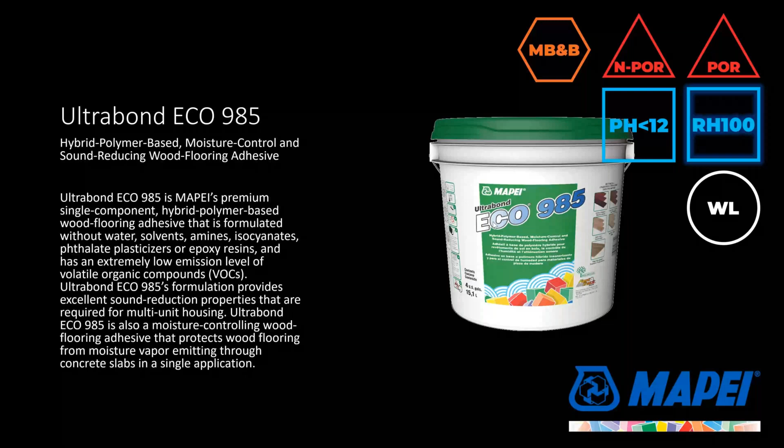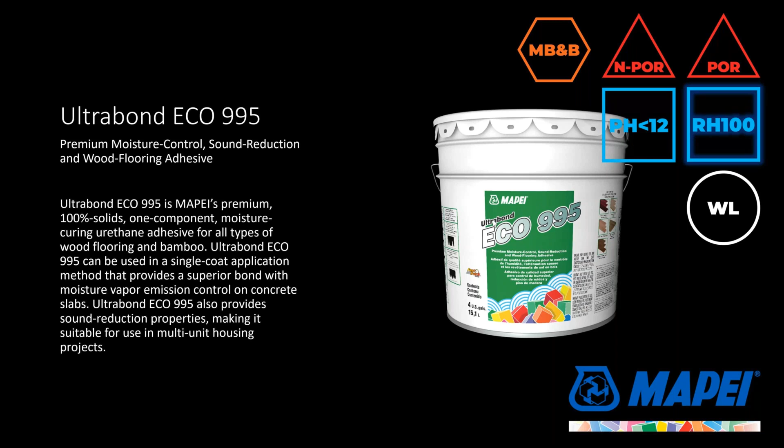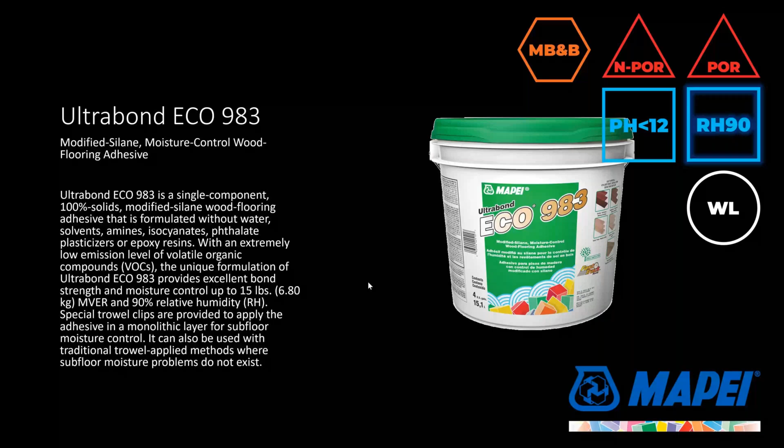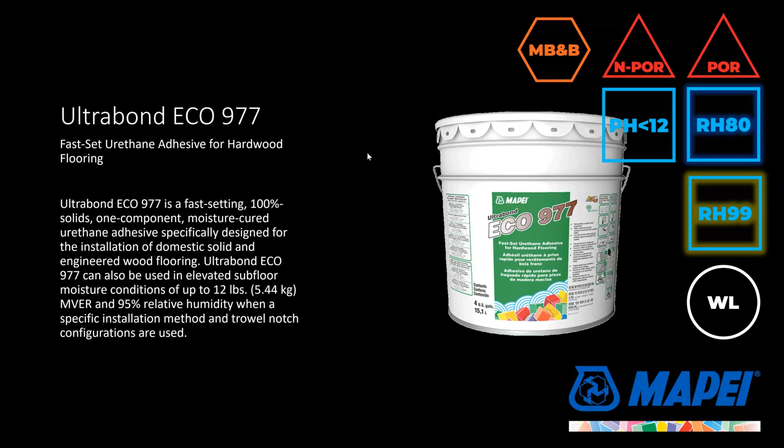So anyway, 977. What I do want to mention about all of these adhesives, from 975 all the way to 977, is that they can be used in conjunction with a single coat of Planaseal PMB, and they all become 100% solutions. Keep that in mind when you're talking to customers about a wood floor installation. A single coat of Planaseal PMB with any of our urethane or MS adhesives provides that 100% protection for subfloor moisture control for any kind of wood flooring going forward.

A couple accessories: Eco 907 is a fast setting, modified silane material, very quick grabbing. We kind of designed this to bond tack strip to concrete substrates. It's cured in 2 hours. You can stretch on it, use it for repairs, use it for nosings, use it for starter rows, whatever. Comes in 10.5 ounce, 29 ounce, and 20 ounce sausages, and is a great product to have in the toolbox for that as well.

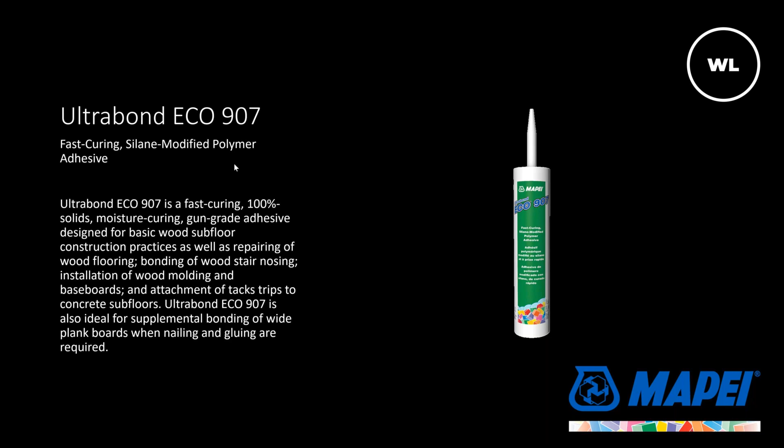903, also available at limited retail environments, is a tongue and groove glue adhesive. There's still a little bit of that business out there where you need to glue the tongue and groove together on some projects or in a repair situation. This is an acrylic that does a great job for that. And it's always good to have a bottle of urethane cleaner on the side to help clean up residues from any of our urethane adhesives. It also works on the modified silane stuff as well.

One other product that's available that just came out in retail, you may see this, is called Ultrabond Eco 904. This is a water-based acrylic material designed for the installation of stair nosings and PVC trims and transitions on residential applications, available at our partner Lowe's.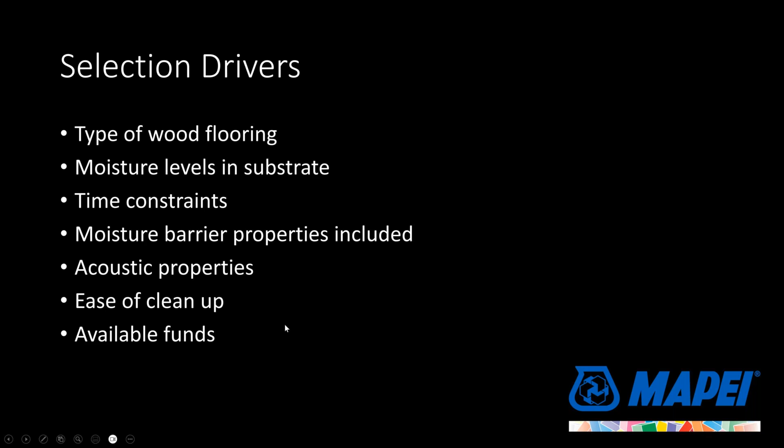So again, the selection drivers for what type of flooring adhesive you'd want to use depends on the type of wood you're installing - engineered, solid, domestic, exotic, bamboo, etc. - moisture levels in the substrate. We always recommend doing some testing prior to making that selection. Time constraints - we have some fast set versions, we have things that take a little bit longer. Whether you need a moisture barrier included, acoustic properties, ease of clean up, or available funds - all this stuff makes a difference on how you do it.

And the last lap, folks - bear with me on this. We're doing good. We are in the business of wood floor finishing.

So this is when I mentioned before about M20 being the only product exposed to the consumer, I lied. We have a whole bunch of wood floor finishing materials that go along with our wood floor installation products.

We start with Ultrabond Ultracoat Aqua Plus. This is an interesting product, it's like a latex that you add to the sawdust fines generated during the sanding process of hardwood floor installation. Once mixed with this polymer, you take a stainless steel or plastic trowel and fill all the cracks and gaps left on the wood. This makes a very nice smooth installation. The advantage is that it will accept stain the exact same way as the surrounding wood, so you won't wind up with funny colored lines or different colored areas. It's all going to stain the same way. An interesting product for the sand and finish type of work.

When it comes to finishing hardwood floors after installation and sanding, there's typically a two-step process. You start with a sanding sealer, the first application that goes on the open wood. When you take a water-based material and apply it to raw wood, the first thing that happens is it wants to expand a little bit. If you run your hand on the floor and it's really smooth, you think it's ready, but after putting your first layer of base on it and running your hand across it, it's suddenly very scratchy. What happened? The wood expanded, the polymer penetrated into the open cells of the wood, and you got a prickly surface on the material.

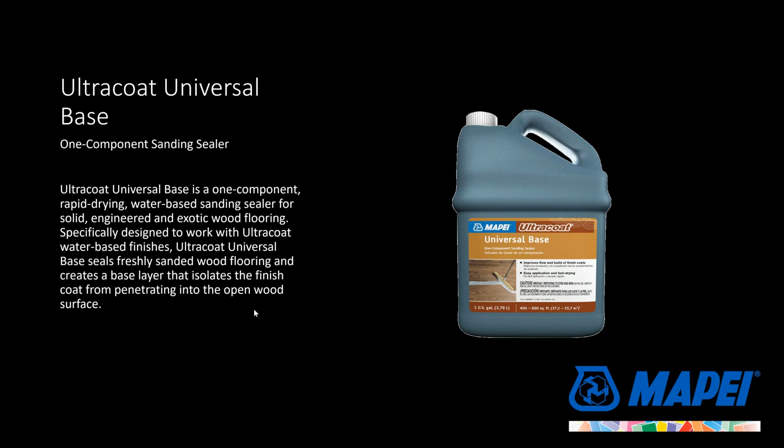We have a premium base, which is a two component base material sanding sealer. It takes a little longer to dry, but provides a thicker layer on the surface, and it's a more durable, stronger material. Where the Ultracoat universal base might be a residential application, the premium base I would look for commercial or high-end applications, for people who want the better choices.

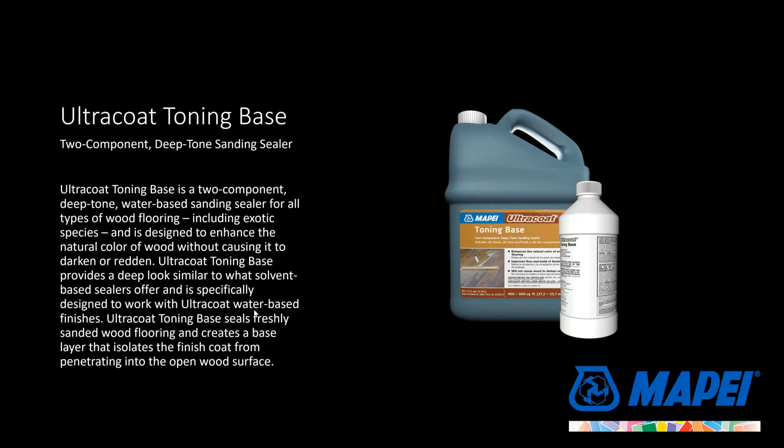And we have Ultracoat toning base. This is an interesting product because water-based products on wood floors typically don't add any color. This industry has been dominated over many years by solvent-based oil modified materials - if you live in a house like I do, there's probably wood flooring sealed with one. Those oils and solvents penetrate into the wood, giving a nice lustrous look. Typical water-based materials don't necessarily give you that deep look - that's what toning base does. So if you spend the money on high-end wood flooring, walnut or hickory or some exotic species, and want that deep, rich look, we highly recommend using a toning base, which helps pop that color, make it look more depth, like it's actually been dealt with an oil-based finish.

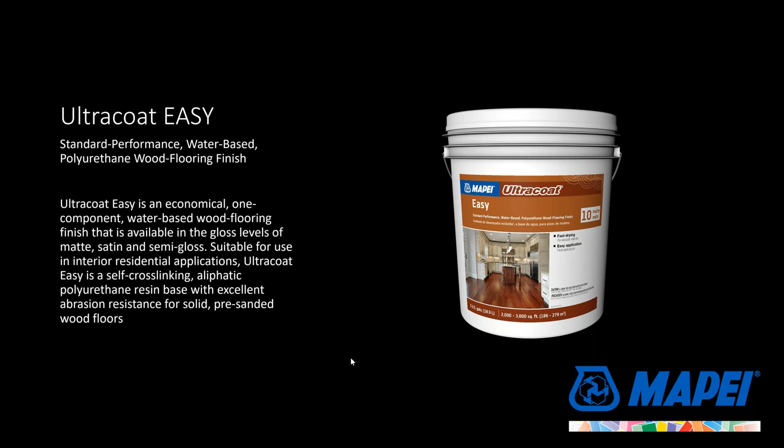So those are our three sanding sealers or base coats, and then we have a variety of choices for the top coats. Ultracoat Easy is what it says - a standard performance, water-based, polyurethane, latex-based material. Entry-level price point, comes in three gloss levels of 10, 30, and 60, available only in 5-gallon pails. It's really for the builder market, the apartment building redo market, etc. It's your price fighter option.

Ultracoat Easy Plus is a one component high solids material, self cross linking. It doesn't require an additional part to work, but it's got great performance. Use this in conjunction with Ultracoat Universal Base and Ultracoat Easy Plus, and you've got a great solution for your bread and butter residential wood floor finishing projects.

HT2K is our high performance two-part isocyanate cured polyurethane material. This is the most durable, scratch resistant, high performance material you can get. It comes in 4 gloss levels, 0 being natural. There's demand in the marketplace for products that are 0 gloss and look like raw wood but are protected, all the way up to 60. You have to mix part A and B to get this, and it provides a phenomenal performance attribute.

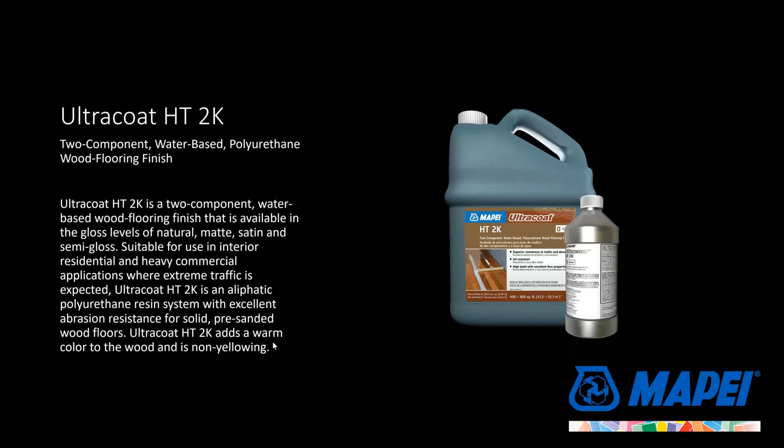We have a couple of products for gym coatings. Ultracoat Gym is a one component solution. These are all MFMA, Maple Flooring Manufacturers Association, approved for sport floors. Ultracoat Gym is good for entry-level wood floors in elementary schools, sports centers, racquetball courts, handball courts, and so on.

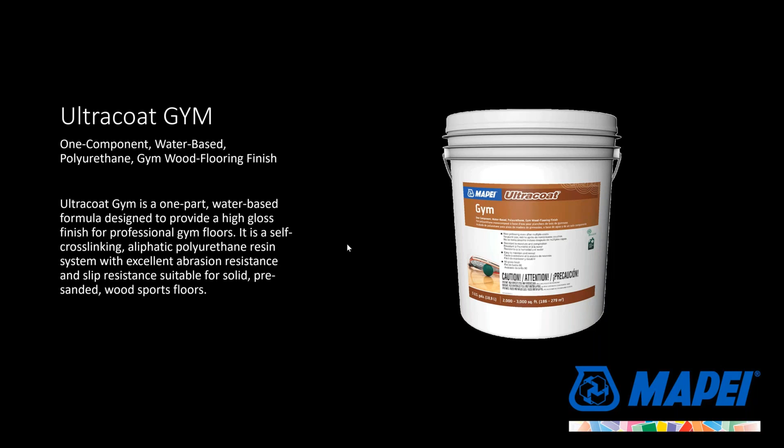We also have Ultracoat Gym Pro, which includes a cross-linker, shown here on the right, that adds greater performance to the material, greater durability, and greater resistance to traction, sweat, and additional liquid on the surface. This one is also MFMA approved and would be used for college level basketball courts or even pro level basketball courts. Again, something to think about.

Next is the Renew It system. If you're in the wood floor finishing business, you have two choices. Starting from scratch is the sand and finish type application, where you've installed hardwoods with nail down methods, you have raw wood, and you have to bring it up and finish it. Or you're dealing with floors already installed that have a finish on them that it's time to refinish, because things wear out and you want to replace the surface.

In that case, you have two choices. One is to sand that existing floor down to raw wood and start over like you're starting from scratch, or you look to products like the Renew It system, which doesn't require you to sand that floor all the way down to the beginning, and doesn't involve all that prep work. All you've got to do is basically a three-step process.

You remove all the existing surface coatings, polishes, waxes, whatever you might have, with UltraCoat Renew It Remover, followed by a rinsing application, the cleaner, which provides a spot-free surface to install on. The floor gets so clean, you walk across it and your feet squeak, and then you apply a primer on top of that cleaned floor.

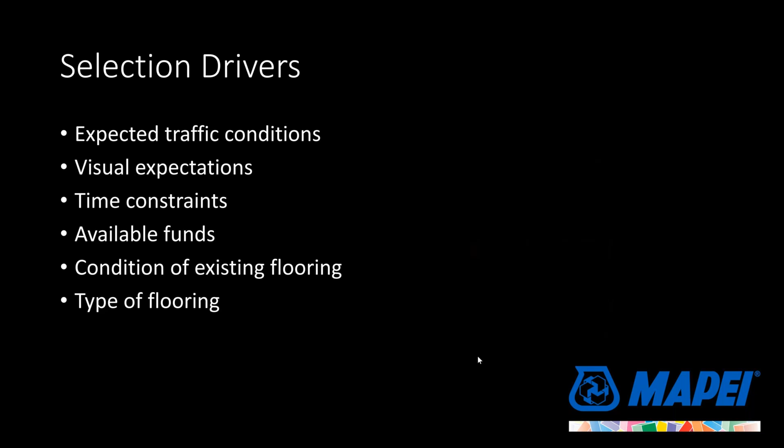And that, my friends, completes the product line review. I hope you've all gotten a glimpse of what the product portfolio is, and there are a lot of things here. I appreciate you hanging with me. We've looked at all that, and congratulations, you've won the race without crashing. Thank you very much for hanging around with me.